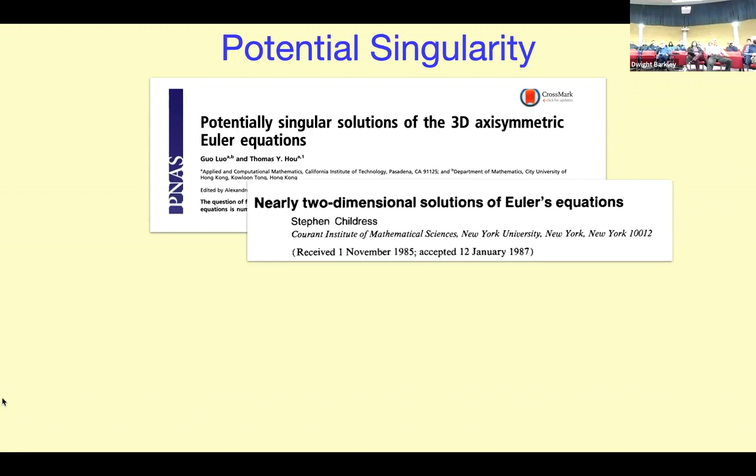So just to tell everybody what the flow is: it's flow in a cylinder, so it's wall bounded, it's axially periodic, it's Euler flow. The initial condition is pure swirl, so you have a sinusoidal azimuthal velocity, counterclockwise in the top and clockwise in the bottom, zero at the midplane. The relevant thing we're going to look at initially is the vorticity, which is the axial shear of the swirl velocity, at the cylinder wall at the midplane.

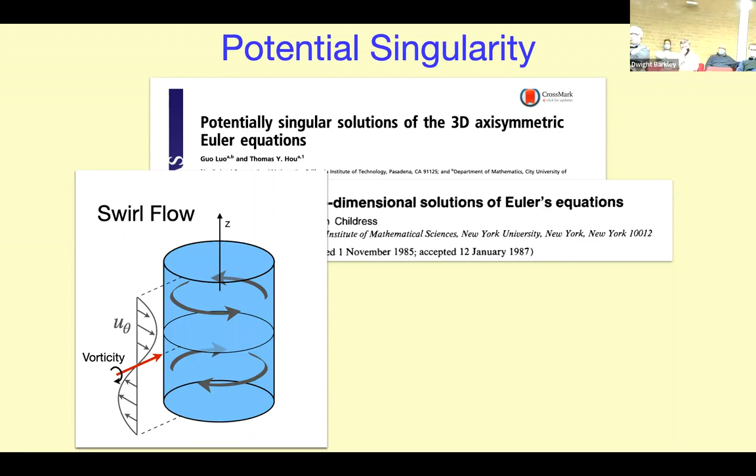Luo and Hou did a very high resolution simulation of this flow, and they found evidence for a finite time singularity. This was referred to a couple of times last week. Here's a plot, the log of the vorticity vector which I showed, as a function of time, and it shows an extremely rapid divergence. They did a lot of other analysis I don't want to get into, but note the divergence exponent is about 2.46.

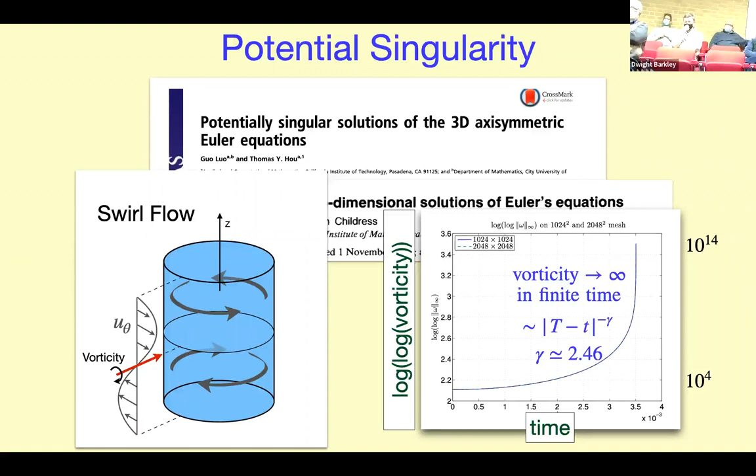Okay, so that's the flow I want to look at. And the thing is, I want to look at it from the point of view of somebody like myself who does continuum mechanics and thinks a lot about mechanics. I want to think particularly about what it is about this flow that potentially leads to a singularity. I'm not trying to solve the general problem, I'm just trying to understand this particular flow. I want to be clear about that from the beginning.

If you think about this problem, it's very natural to focus on pressure rather than other things, because in an inviscid flow, pressure is the only stress acting, it's the only way you can accelerate the flow. So it's a natural thing to think about when you do mechanics.

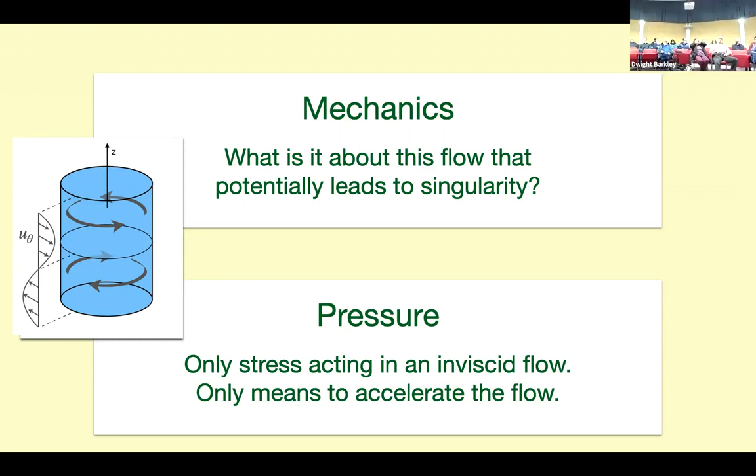Luo and Hou had exactly one visualization of the pressure in this paper, and this is in fact partly how I got involved in this. You're looking at a meridional slice through the cylinder, where the place the singularity is going to form is on the outer wall of the midplane, which in this figure appears down here. This is the pressure field that they saw, and this is as close to the singularity time as they can resolve.

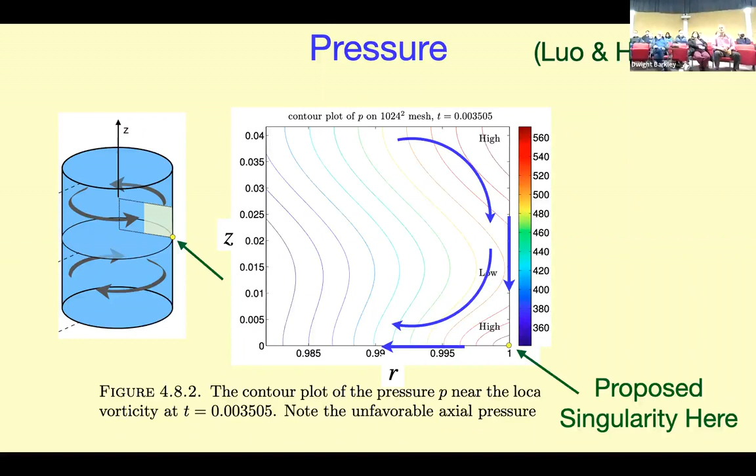It didn't take me any time at all. You look at these contours, and you can be sure that there's no possible way this flow could be singular. This is not possible. If you have pressure contours that look like this, the flow cannot be singular. So for about 10 minutes or so, I was convinced they had made a serious error. That's just not possible. Now, I was wrong, they were right. But the story is interesting. So I'll let you think about how I can be so sure so quickly that it couldn't be singular.

So what I'm going to do is first describe the flow in more detail, since I haven't really described it in great depth. I'm going to remind the broad audience a little bit about Burgers singularity, the aspects of it that I need. Then I'm going to discuss the mechanics, and how you can decompose the pressure and slide a lot under the rug there, and then discuss how you can model this with a closure.

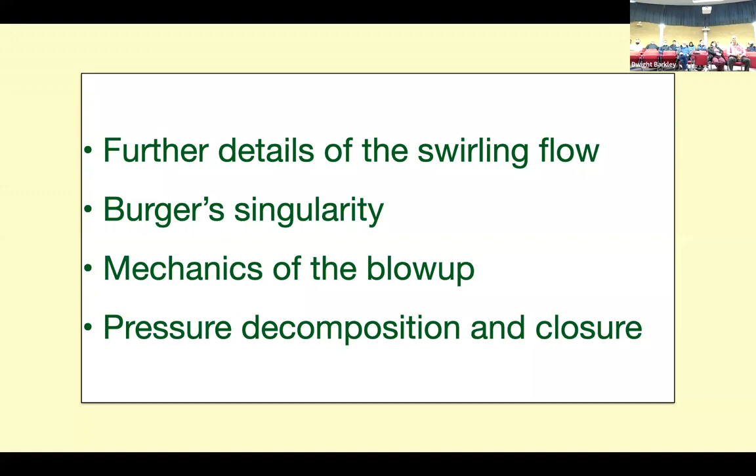Okay, so the one bit of physics that I really need you to know is that curving a streamline costs you a pressure gradient. Everybody knows that with a swirling flow you have high pressure on the outside and low pressure on the inside. You have to have that. A curved streamline is an acceleration, you have to have a pressure gradient. It's the only stress we have in this flow, the only way we could add a force to the flow. It has to be a pressure gradient.

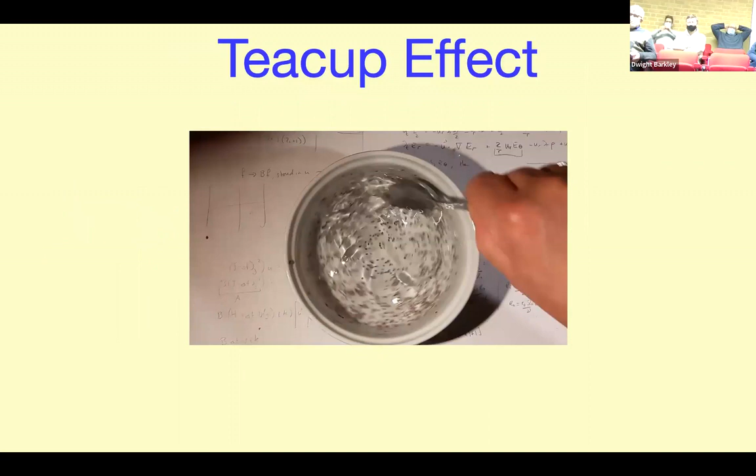And then you need to know that it goes as velocity squared. That's going to come up constantly in this talk, it goes as the azimuthal velocity squared. People know this teacup effect, this is Lorette stirring some grains in a dish, and contrary to what you might expect, they're slightly denser than the fluid.

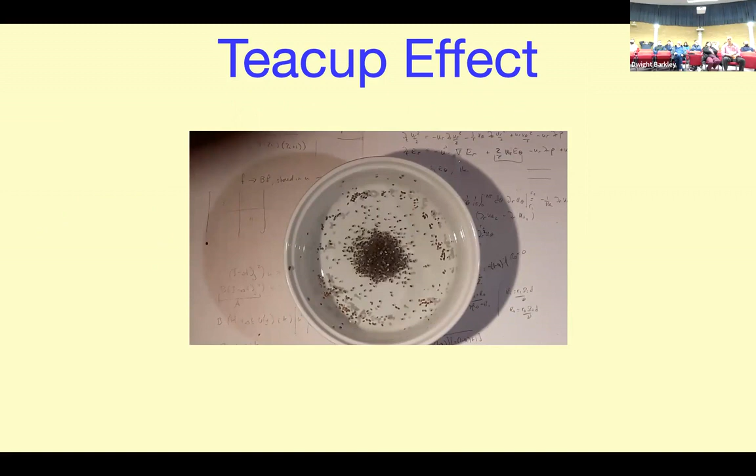You might think they could go out, but in fact they go in - it's the teacup effect. I think people are generally familiar with it. You can do anything at the institute afterwards if you're interested.

Einstein is credited with being the first person to explain it, although people before Einstein surely could explain it if asked. The reason it occurs in a teacup: if you have a bottom boundary, there's a viscous boundary layer there which slows down the azimuthal velocity. The azimuthal velocity goes to zero, and hence this balance between the azimuthal velocity and the pressure gradient is no longer satisfied. You have a pressure driving flow along the bottom wall, and then you get recirculation.

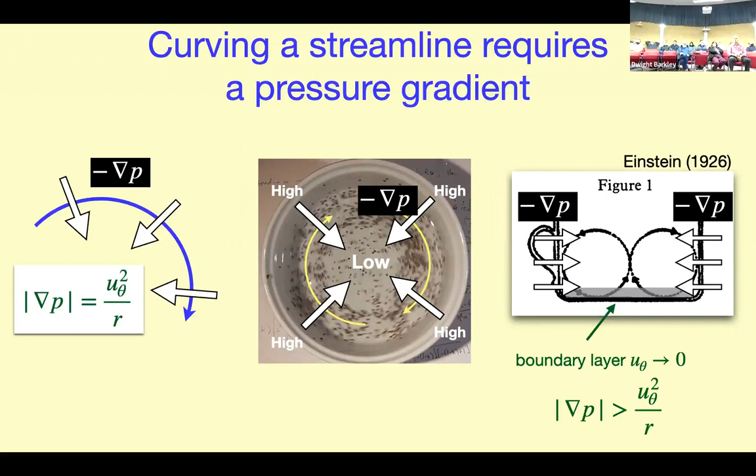It's secondary flow, and we refer to that as the secondary flow. This primary flow, the swirl - that's the way it works. Now this is a similar thing, you can do a similar thing in this case. You replace the bottom boundary layer by symmetry. So you have swirl on one side at the top and the other side at the bottom, zero swirl at the center. By symmetry, that will remain zero swirl. So you have exactly the same situation, but without a bottom.

So what you're going to have is swirling flow here, that will give you a high pressure, and swirling flow there, that will also give you a high pressure. Notice it doesn't depend on the sign because it's quadratic. Low pressure in the center where there is no swirl, so you have a pressure gradient acting. This is the way you would explain it in terms of pressure. There's an equivalent explanation in terms of vorticity, but I'll explain it in terms of pressure.

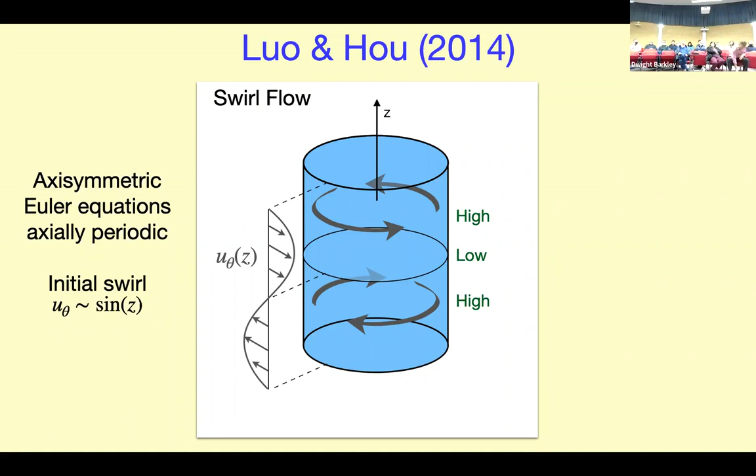That will drive a secondary flow, which for the full period of the cylinder repeats this four times. The teacup is just a quarter of the cylinder, from here to there - that would be the teacup that is repeated by symmetry.

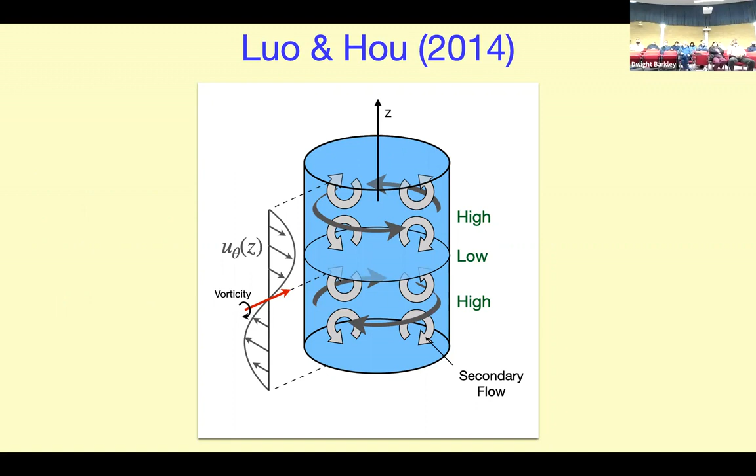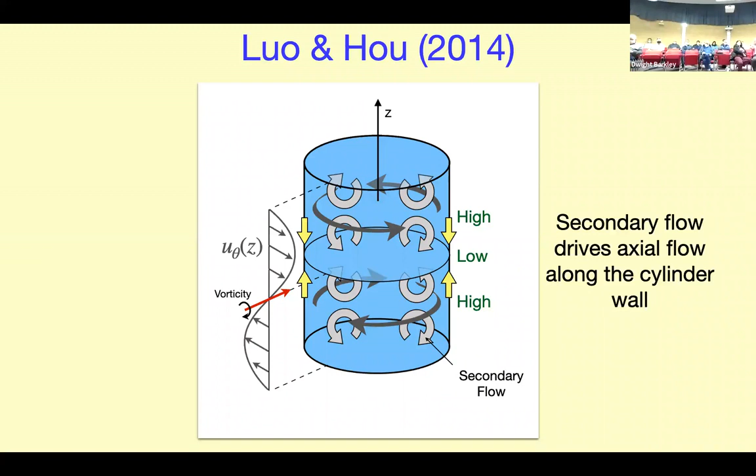So that's the secondary flow. That secondary flow, you can see, is going to drive axial velocity towards the midplane. And when that happens, it's going to bring the swirl with it. You're going to drive the swirl towards the midplane, and you're going to intensify the vorticity. That's the mechanism - that's the basic kinematics of what happens.

I made a little model out of things I managed to pull around from the institute. Okay, so here's your flow. If you just had straight flow here, it wouldn't do anything, right? It's Euler, there's no viscous stresses. But if you put this in a container, so it's being forced to be curved...

Never mind this. Anyway, so that's your vorticity blowing up. It's this gradient of the swirl velocity that is the vorticity that's blowing up. Kind of key that you understand that.

Okay, good. Any questions? So now I'm going to show you a little movie from my simulations. It's the same thing, you'll see.

Actually, I do have a question. That's okay, yeah, let me just - okay, so you see the movie, that's out of the plane into the plane. They're coming together. Okay, guys, go ahead.

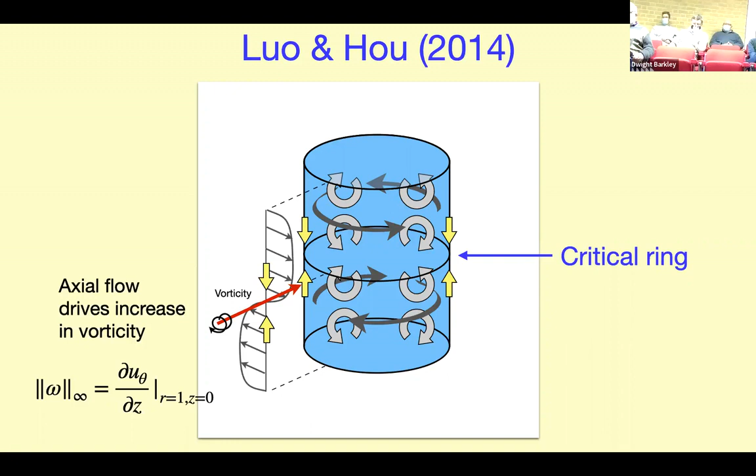Well, it depends - so it's here, and then it drives the flow, in terms of the teacup, along the bottom of the teacup towards the center, and the tea leaves are more dense than the fluid, so they settle in the bottom center of the teacup. If you're asking about the teacup - oh, in that movie, the things were settled on the bottom. They settle on the bottom because they're more dense. That's key.

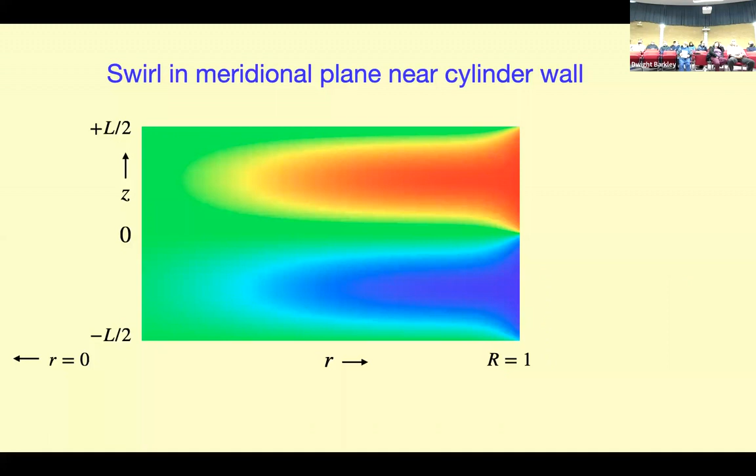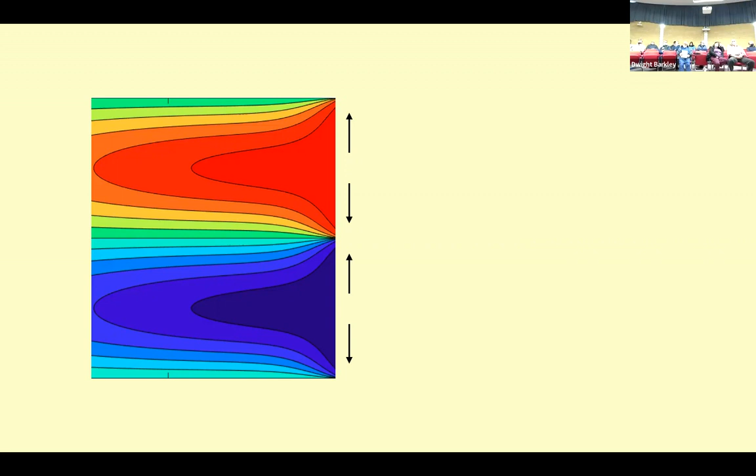As close to the singularity time as I can simulate with this kind of basic simulation. This is what the secondary flow actually looks like - not just a sketch, but the actual secondary flow - and this is the driving of the flow towards the midpoint. Let me just say, this is the meridional flow. This is most of what we're going to see, these meridional planes, so theta equal constant, and it is axisymmetric. So obviously, you're in the middle of the plane, and you're only looking very near the outer walls.

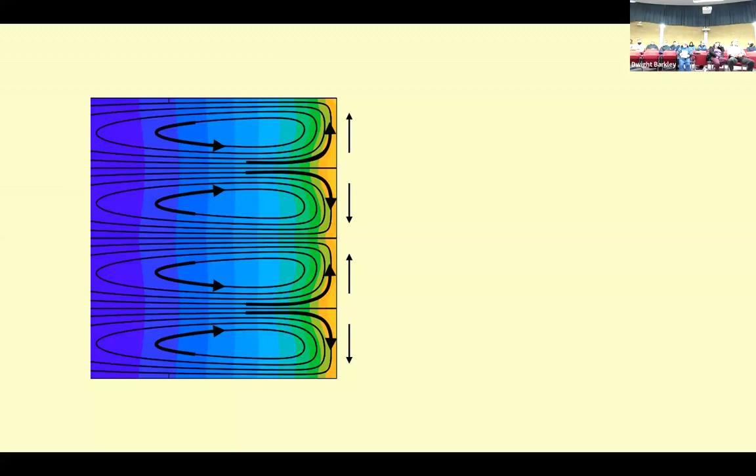What I'm going to focus on is an enlargement of a very small region, size 10 to the minus 3. This is what I care about: a pressure field and the meridional velocity in the plane. You don't see the swirl. It's this pressure field that I want to understand.

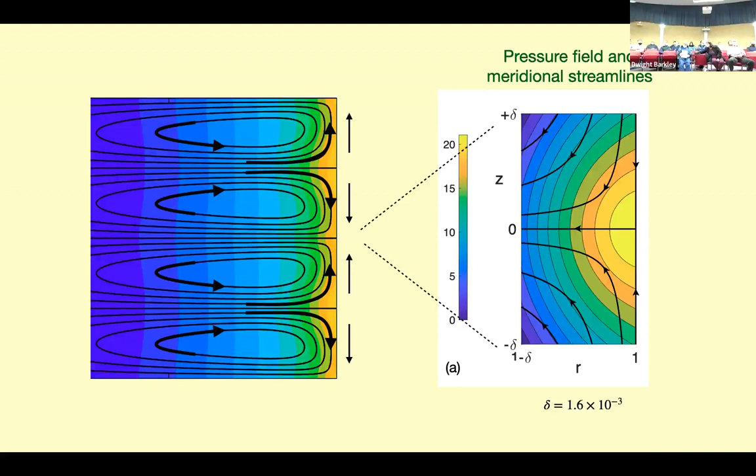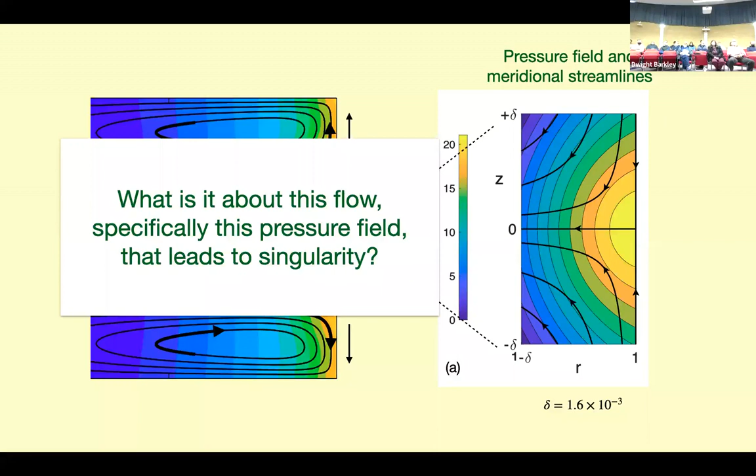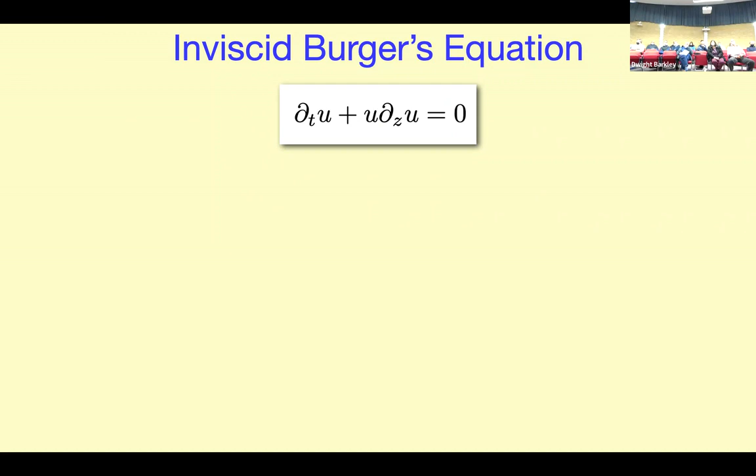Let me give you this, since I know there's different expertise in this audience to discuss this equation, and there are some things I'm going to emphasize. So I'm going to consider the inviscid Burgers' equation, our friend, which has been mentioned many times last week.

We know that if you start with an odd solution and evolve it, you get a singularity. It's normal to think of that in terms of the characteristic equation, but I want you to think about this in terms of inertia. As we know, this is a statement of the acceleration of the fluid, and over here go the stresses. There are no stresses in the inviscid Burgers' equation, so the acceleration is equal to 0.

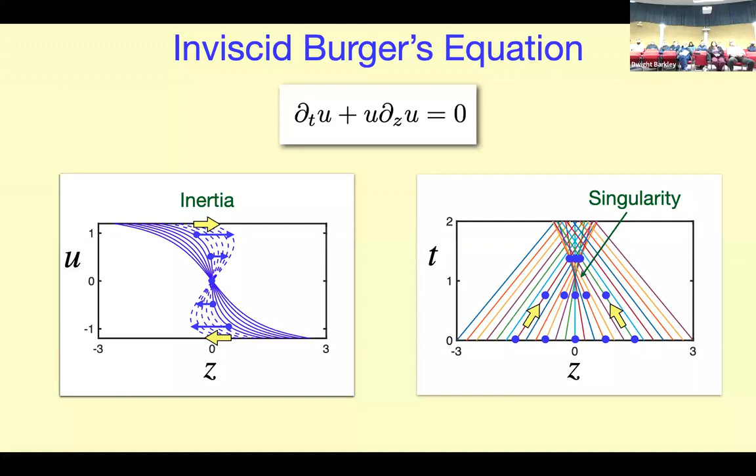So you invoke Newton's first law: velocity is equal to a constant unless acted on by a force, and that's why you see straight characteristics. That's a statement of Newton's first law, and I want you to think of it as inertia. The fluid is coming in, there are no stresses to stop it. All the fluid particles move in straight lines, and they just overtake one another. So it's that physical equation.

For people who aren't familiar, the way I'm going to analyze this for the actual Euler equation, so we do the first practice problem for inviscid Euler, is I'm going to take a gradient at this point of symmetry, of odd symmetry, where the velocity is 0, and take the axial gradient of that. We'll call that capital W. Throughout this entire talk, capital W will never mean anything else other than a gradient of the velocity at this point.

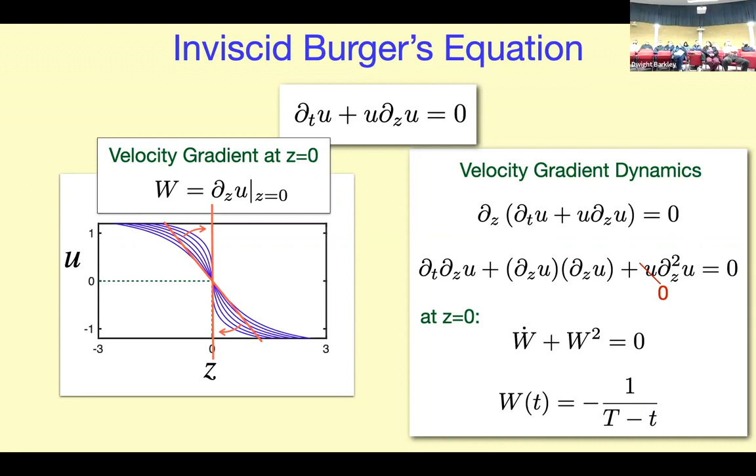So then you can work out, if you differentiate this in Burgers' equation and use the fact that the velocity is 0 there, you get this equation for the velocity gradient, which you can easily integrate up to see the singularity, just in terms of the velocity gradient at that point. Again, that's a standard thing, but it's very useful for me to show you this first.

If you haven't picked up on this yet, I was specifically calling that Z with the idea of being analogous to what happens on the cylinder, where I'm going to be looking at what happens on the wall of the cylinder, and Z equals 0 will correspond to this. That's the analogy I said. Now the difference here is that for Euler we have the full 3D Euler, and we have the pressure stress, the stress on the side, so we have to understand that. But the approach is going to be similar.

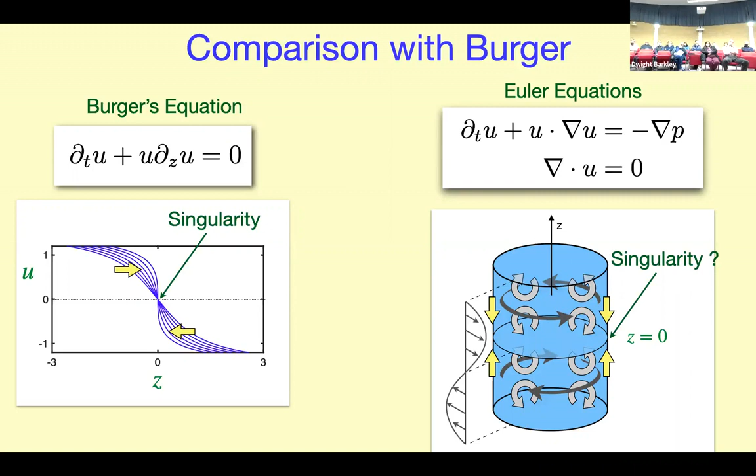I'm now going to discuss the mechanics of this. I'll repeat this same statement over and over, but as we get further into the details, what I want to understand is how this pressure field, this real pressure field in real incompressible flow, nevertheless allows for a singularity. I'll note that there's the inertia coming in, which we saw from Burgers', that's still there.

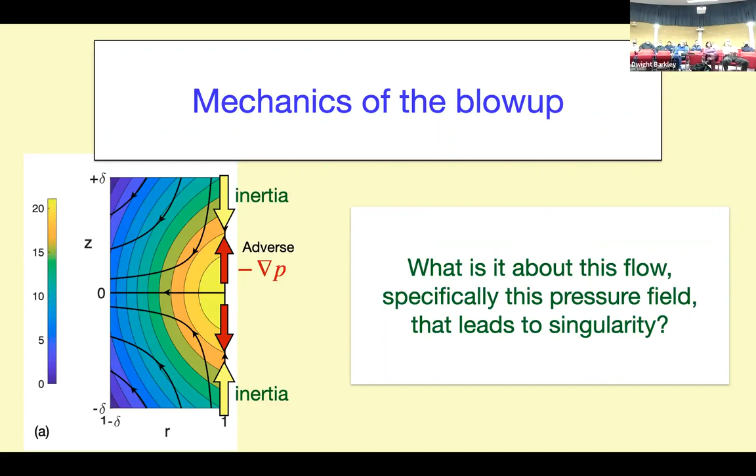This fluid has inertia coming in, but there's a pressure maximum here. There has to be a pressure maximum in fluid dynamics — I could have told you that right at the beginning. You have to be diverting the inward flow towards this midplane. I told you if you curve a streamline, that costs you a pressure gradient; you can't do that any other way. There has to be a pressure maximum at this point. There's no other way for this flow.

Yes. Yeah, with that picture, it's more or less exactly the picture I'm describing in 2D for the growth of vorticity. It's this result of Sverak, and that would be very... okay, gotcha.

What I'm saying is that something like this does give rise to double exponential growth, but may not give rise to singularity. We'll discuss that. It would be very interesting to know what this approach might have to say about that example. I think that's a very interesting question. I'm wondering about it, but I don't know how to approach it.

This is 3D then. Yeah, of course, this is crucial — I mean, I lost my little yellow vectors, they didn't stick on. But this is a 3D flow.

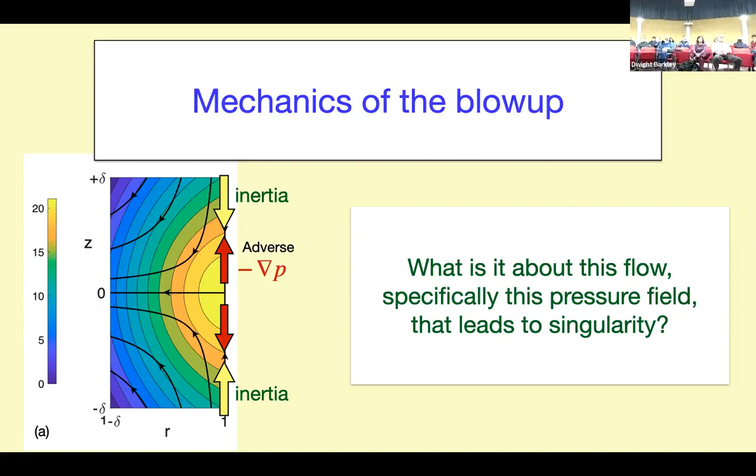Okay, so I have to account for why that pressure stress isn't sufficient to decelerate the flow. That's what I'm going to do. I'm just going to write down the velocity gradient for the Euler equation. Many people have done this or seen this, but I'm going to go through it.

I'm only going to evaluate the velocity gradient at the critical ring, that's where the singularity is, and there are only three surviving entries. W is the axial gradient of the axial flow, that's all it ever means. B is the radial gradient of the radial flow, and omega is the axial gradient of the azimuthal flow, that's the gradient I keep referring to, that's vorticity. But that's all that survives.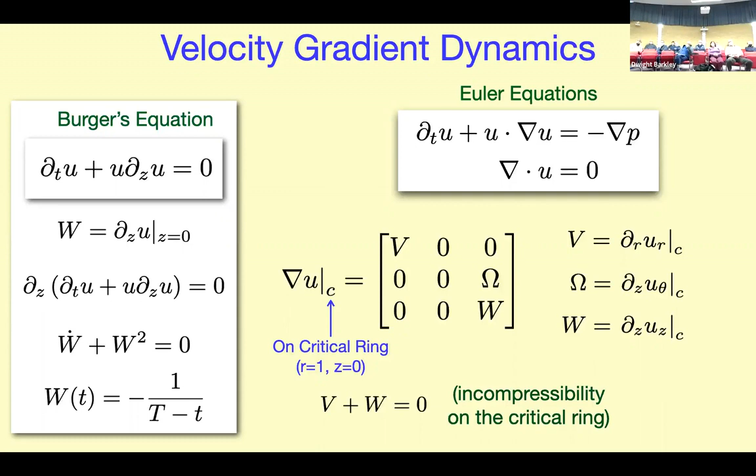And of course, this is a traceless matrix by incompressibility, so there's only two independent parts.

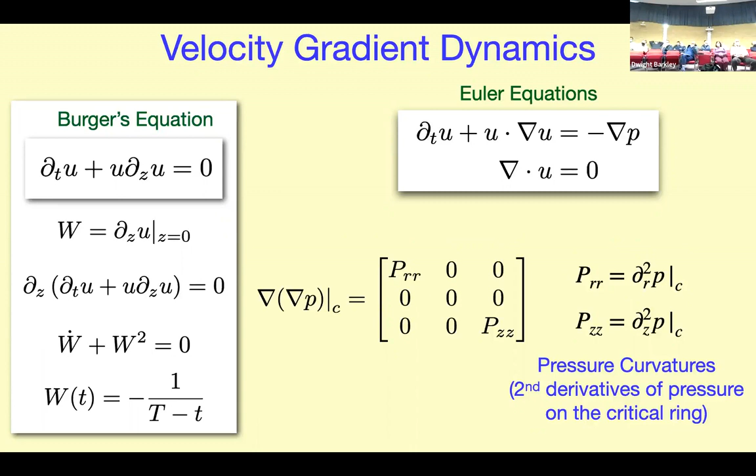Then the good part is that I look at the pressure Hessian. So I have the two diagonal elements, that's all that survives: the second radial derivative and the second axial pressure Hessian. I'm going to refer to these as pressure curvatures, and I want you to think about it that way. If I take my pressure field and draw it as a graph, then these are the principal curvatures of that surface at the critical point. It's very useful to have that terminology to think about.

What was W? W is the axial gradient of the axial velocity.

Okay, so that leaves me with these three equations. If I just plug into Euler and evaluate the velocity gradients at the critical point, I get three equations and four unknowns. And these have a very clear physical meaning.

This is an axial momentum balance. This is the same thing I had with Burgers, but now I have the stress that appears on the inside. This is vortex stretching, nothing else to say about that.

And then I have, you can do this one of two ways: it's either the pressure Poisson equation, which evaluates at the critical ring, or equivalently it's a statement about mean curvature. The two pressure curvatures sum to twice the mean curvature. So minus W squared is the mean curvature. That's a very useful thing too.

So I have three equations and four unknowns. Obviously I can't solve this. But these equations are very, very useful for understanding what's going on.

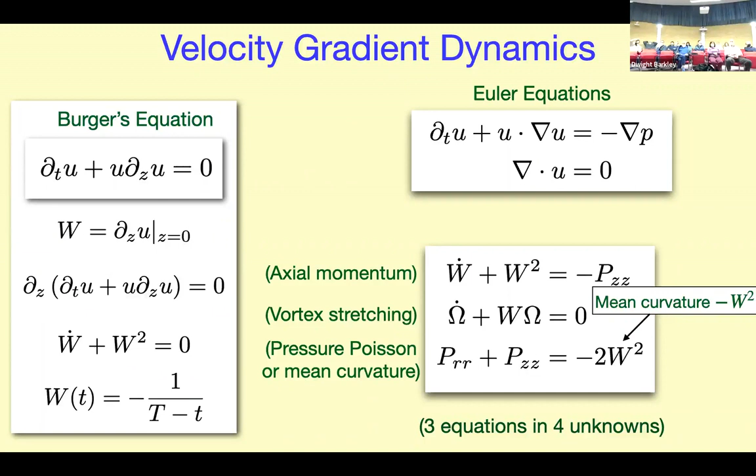Okay, so I'm going to do three problems. And then there's going to be a quiz later because I'm going to come back to these same three problems. Pay attention. So the first thing I'm going to do is scratch off the pressure.

That's going to take me back to Burgers, obviously, together with the convection, and I just carry the passive scalar along with it. So I just reproduce Burgers' equation, which we've already done. It's a singularity. The vorticity now blows up along with the same as before. It's just nice to know that this contains Burgers' equation.

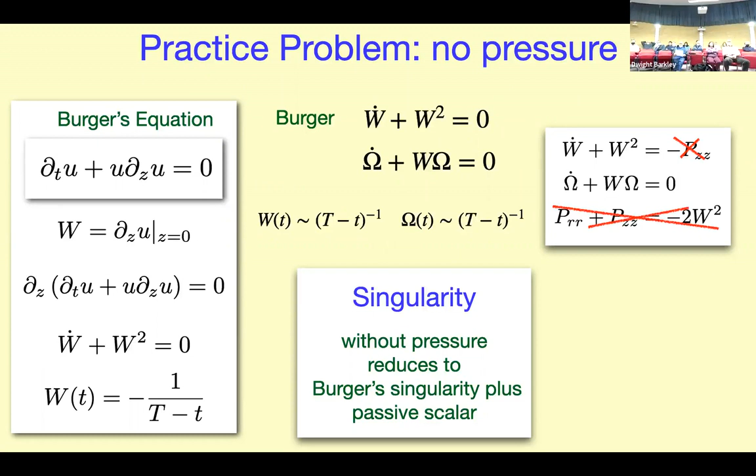The next practice problem is: let's suppose we have a symmetric pressure field. There's no reason you'd have a symmetric pressure field, but let's just suppose we did. Then the pressure curvatures are equal. So I have my pressure Poisson equation to worry about here, and if they're equal, they're both equal to the mean curvature. So PZZ is equal to the mean curvature, which exactly compensates that.

And if you look at the equations, my axial momentum balance has the nonlinearity exactly balanced by the pressure stress. They exactly balance. W dot is zero and there's no singularity. Good thing—it's a two-dimensional flow, it couldn't possibly be singular.

So if I have the symmetric pressure, my view is that that is probably the simplest example you would ever show somebody if you want to just take a saddle plane and show how the pressure stress exactly balances nonlinearity to suppress what would be a singularity in Euler. It's suppressed when you include pressure. That's the example I use.

So I have, again, I'd like to think of it as I have a curvature budget to use. And if I use them equally here and there, and I have a pressure gradient here and a pressure gradient there, I've used them equally, and that will exactly balance the inertia. So W dot will in fact be exactly zero.

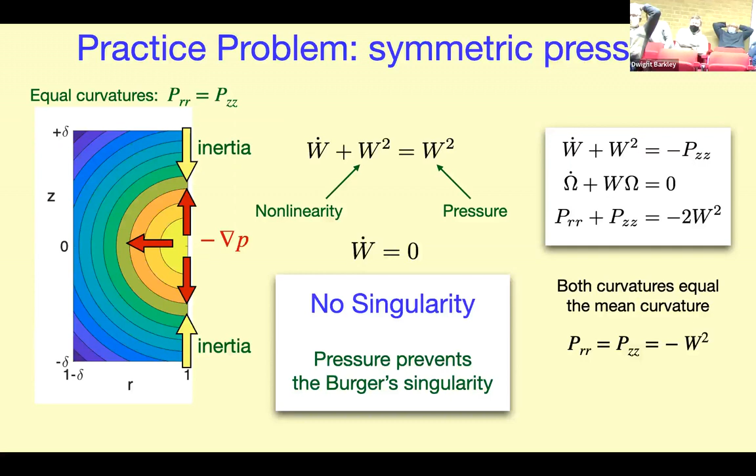Okay, now let's just do the real problem. So the real problem looks like this. The pressure field looks like this. You maybe didn't really notice very carefully what it looked like, but now I'm showing it to you.

Okay, these pressure curvatures are not equal. The radial pressure curvature is larger than the axial pressure curvature. They're not equal. So I will define A such that this is true, and then I define it with A squared so that I get this as a ratio of length scales rather than just this.

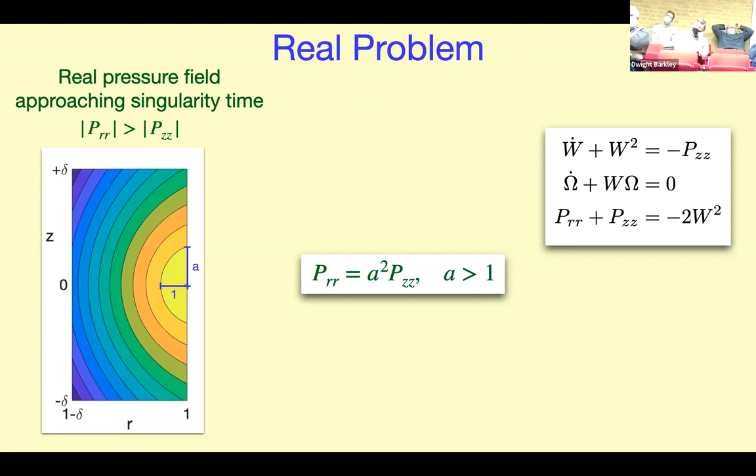Okay, you can see that in this figure the A is bigger than 1. That's very important. But let's just play with some algebra. Whether or not A is bigger than 1, you can just do some algebra, and you'll get that, of course, if these two aren't equal anymore, you wouldn't expect this to exactly balance that, and it doesn't. You get a statement here, depending on the value of A. And you can see if A is bigger than 1, this will be less than 1, and this won't exactly translate.

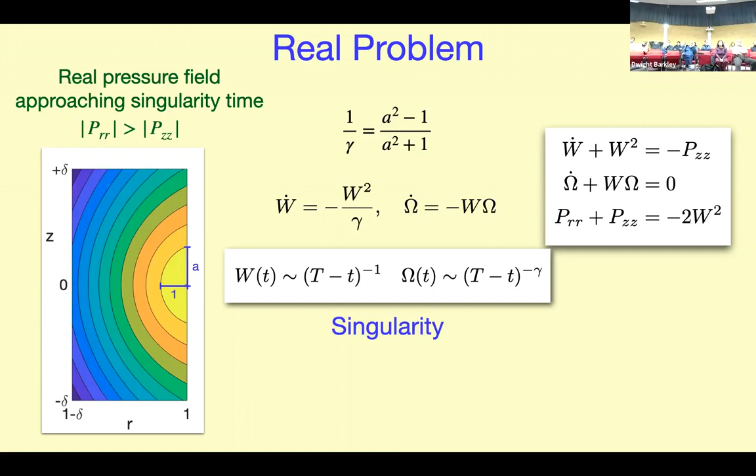So we have this blow up. And if you look at the Luo and Hou simulation, the exponent was 2.46. If you translate that exponent back, A is 1.54. Here I've shown 1 to 1.54, as close as I could do it in Keynote. And you see that that is clearly the signal of that exponent. That is what you would expect to see in a pressure signal for blowing up by this mechanism with that exponent. And there it is. It's really the thing.

I'll get back to the assumption that these are constants. So what I'm saying now is that once you make these unequal, then you have your curvature budget. You use a bunch here and less there, and you don't have enough to suppress this incoming inertia, and you'll get blow up. And that's a very simple problem. What makes you think that A should be time independent? But let me address what happens there.

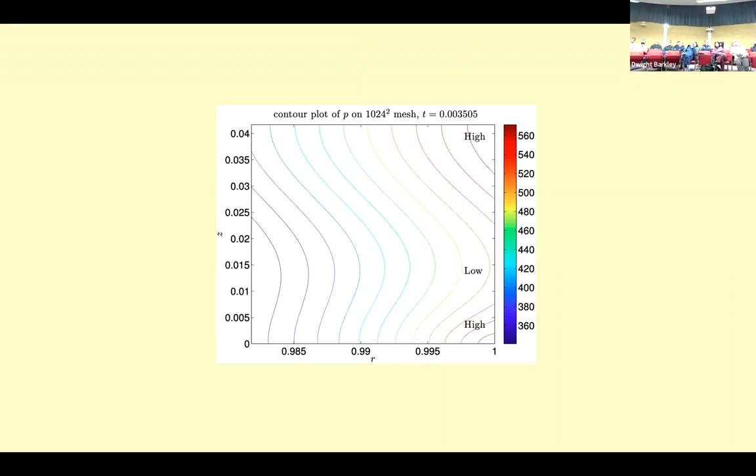So you can now maybe appreciate why I was confused by this. This is wrong, this contour is going the wrong way around. The thing is that you hadn't plotted it with the right aspect. You plot the right aspect ratio, now you see that's the signature you're looking for a blow up, not the other way around. You need that signature. You need this to be bigger than that, so that you have less pressure gradient in the axial direction. So that's why I was confused by it.

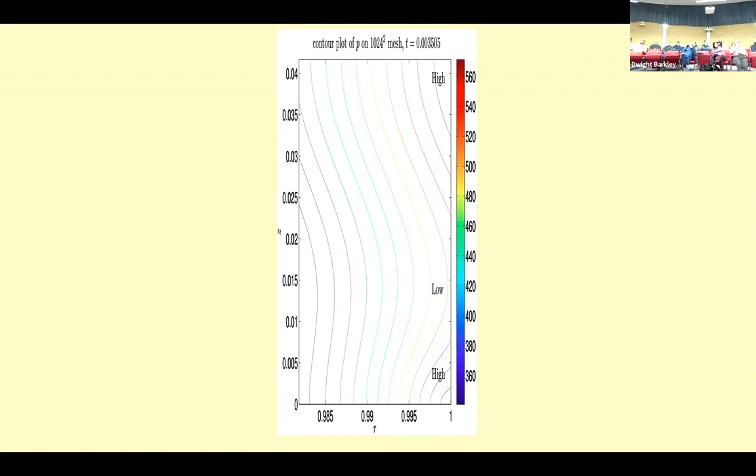But there it is. As close to the singularity time as they could measure, there's that signal. That's what you should be looking for. That's the signal for blow up. So the curvature of the radial is less than... greater. Now the curvature of the radial is greater, so greater pressure. So you're throwing fluid radially inward faster than you're slowing it down axially. And that will be nice. So these are simple calculations.

Okay, so the thing is, and this gets back to the non-constancy. As long as this is persistent, as long as it's persistent up to this time, this will be the same. I don't do theorems. I'm sure that half the people in this room will turn that into a theorem. It doesn't prove anything, but you need these to be satisfied. It wouldn't be difficult to write this formula down with the conditions. It's just too simple.

Okay, so now this is what I really have. That's the introduction, so this is the easy part. If you have this pressure mismatch, then you don't have enough stress to decelerate the incoming fluid. And then the question is, why does that happen?

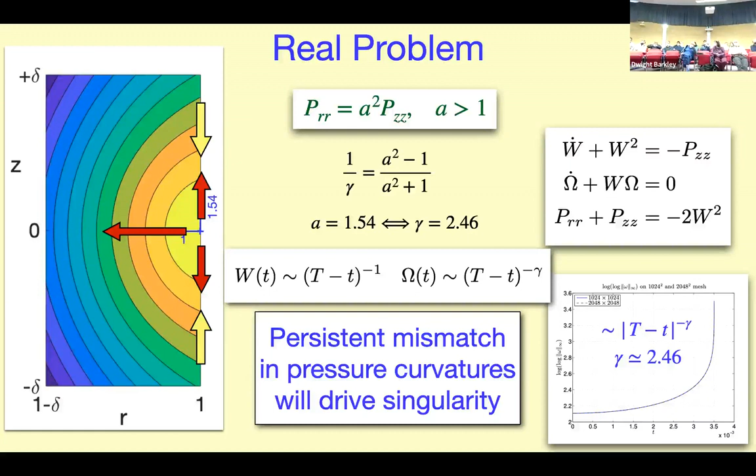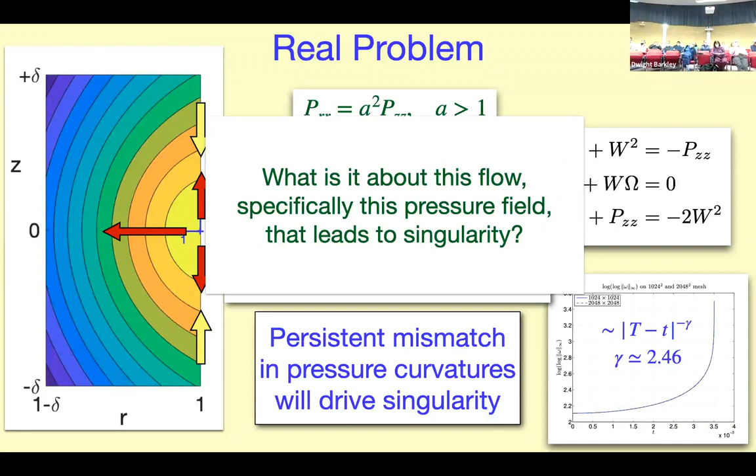Okay, so now I'm going to explain it. Same question again - I got somewhere in it, but I still haven't told you why. So now I have to do this. There's a lot of applied math technicalities here that are not very important, and I don't want to get too involved in communicating them. You can read the paper, but I'll try and give you the highlights.

So this part is known, this part is easy. We have the Euler equations together with its boundary conditions. Wall-bounded flows, so the penetration is zero. The radial velocity at the wall - later on I'm just going to call this the wall - the radial velocity at the wall is zero.

So, to maintain incompressibility, the pressure must solve a Poisson equation together with boundary conditions such as to confine the fluid. So the fluid is doing two things, and the pressure field is doing two things. So this is what we have - our pressure Poisson equation together with this boundary condition.

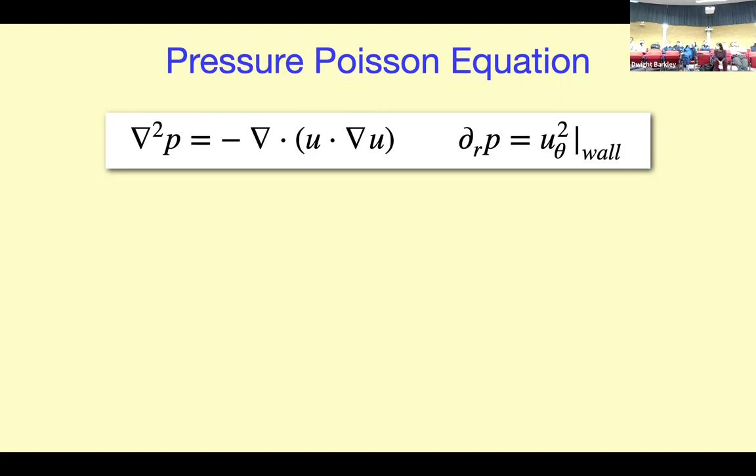Now, something that I think is very underappreciated in certain communities - this is a linear equation indeed. I know, but it's somehow forgotten because it's not linear in the velocity. It's nevertheless linear in pressure. So we can exploit that, and we can separate it just as you always would.

I'm going to separate it first into contributions from the meridional velocity and the swirl. I'm going to do those separately. You can separate those two contributions to the pressure field. And then I want to separate the parts from the swirl having to do with incompressibility and confining the flow - you can separate all those terms out separately.

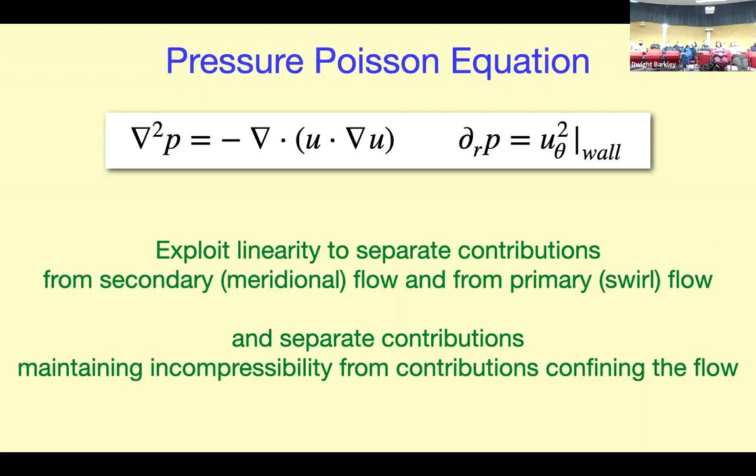Okay, and then this is where the details are that I don't really want to get into. I'm going to sweep it under the rug mostly with the pictures, and I hope that will suffice. I'm sure you could all write this down if you wanted.

So let me just show you. First, I'm going to separate the pressure into two parts, one due to the meridional flow and one due to the swirl, and I will explain it in pictures. So this is the full pressure field, and it's a linear superposition - there's no approximations. This is just a linear superposition of two.

One, I'll call it P2D, and it's a function of the pressure field - these are the pressure contours that you see here. It's determined by the radial and axial velocity, so the velocity field in the plane. The velocity field is shown by these streamlines here.

It's global, it's the whole cylinder, but I'm showing you this piece right here. This supports all the curvature, the mean curvature of this flow. It has to all be contained in the meridional field because it's dependent on the meridional field - it can't be dependent on the swirl. So this and this have the same mean curvature.

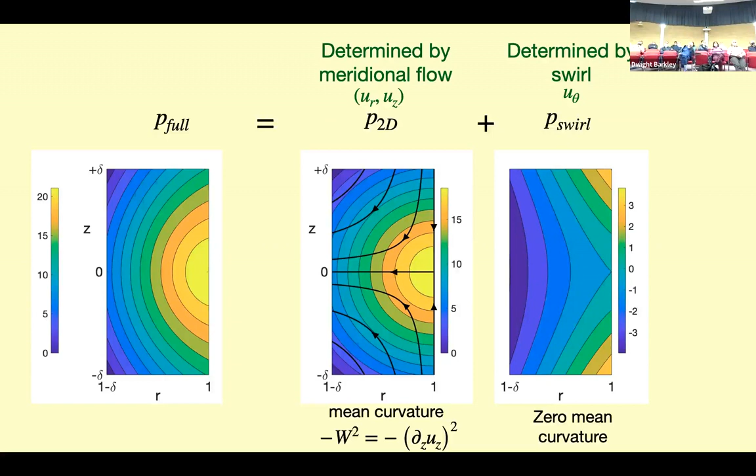So that's one of the two pressure fields. The other one is dependent only on the swirl, so the flow into and out of the plane. And that generates this pressure field, and this pressure field necessarily has zero curvature at this point.

So it's a saddle point, and it encapsulates the teacup effect - high pressure here, high pressure here. There's an axial gradient of the swirl, which you don't see. So I'm showing you this one, but it gives rise to motion towards the midplane and away. It's entirely contained in this pressure field.

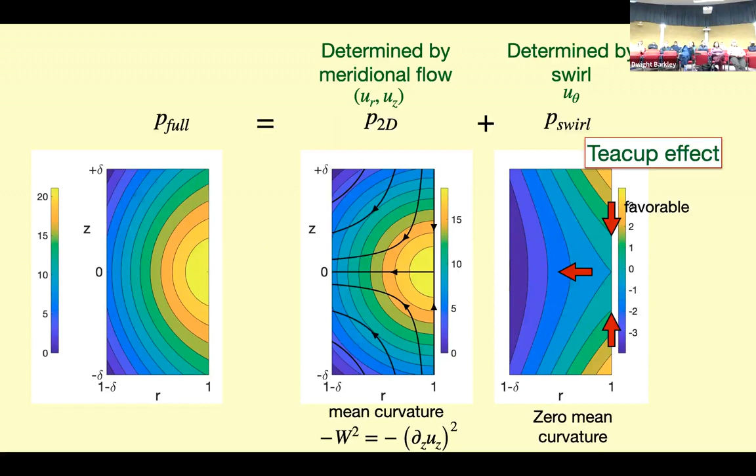Okay, so I've done that. Now what I need to do is separate this swirl pressure - it contains both the boundary part and the interior. I have to separate boundary from interior. I don't know if any of you have ever done this in cylindrical coordinates, but if you try to separate a Poisson problem into boundary and interior parts, it doesn't work that way - there's a third part that you have to do to separate.

Okay, I'll just talk to the experts here. If you were doing a Poisson-esque approximation, this wouldn't occur. So I'm just going to sweep it under the rug - I'm going to combine this with that. I'm not really doing anything fundamental.

Let's do this. I'm going to decompose my swirl into two parts: one part determined only by the swirl on the wall, which is not the interior problem, and the other determined by the swirl in the interior. So I separate the boundary swirl from the interior. That's a standard thing to do in solving Poisson problems.

Okay, now let's look at this, at least near this place. So this pressure field that you see here is determined only by the swirl on the wall. It's a harmonic function.

I heard at least two times last week people said under their breath, 'plus a harmonic function that we don't worry about.' And I grant in infinite problems maybe you don't have to worry about harmonic functions, but this wall boundary is a harmonic function. It's not doing anything towards the incompressibility of the flow. It's not, but it is a stress—it is accelerating the flow. It's just not accelerating in any way that controls for incompressibility, but it is nevertheless accelerating. It's a harmonic function.

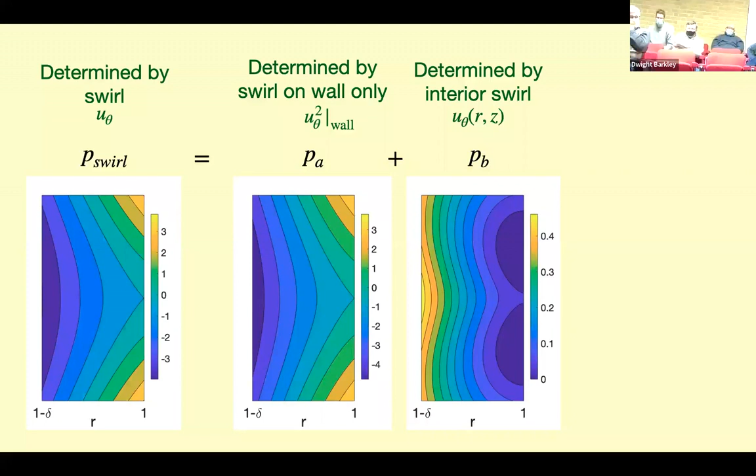This is the key one right here. You see that the pressure from the swirl is almost identical to the component determined by the wall, the swirl on the wall only, right.

I think we can skip that. So here's the summary and pictures of this part, okay?

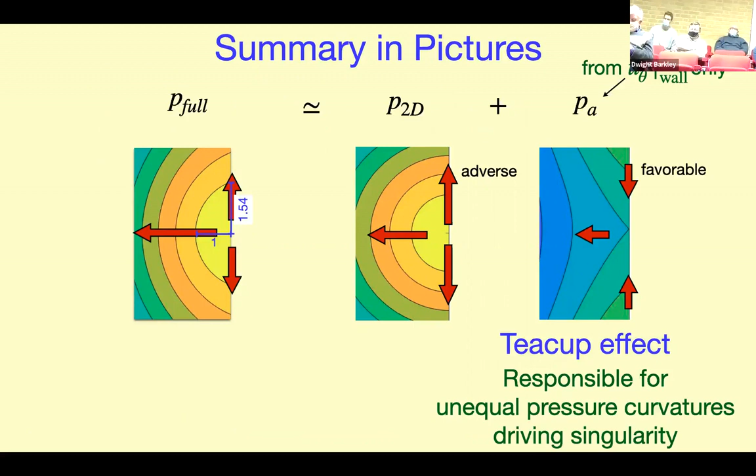So I have this mismatch of pressure curvatures. I can decompose that into two main contributions: one due to the in-plane flow, which gives me this pressure maximum that supports all the curvature of that—it's an almost symmetric pressure maximum, not exactly, I'll have to worry about that later too. And this part, which is determined only from the swirl on the wall, gives me a favorable pressure gradient, accelerating fluid towards this. And this is the essence of the decomposition.

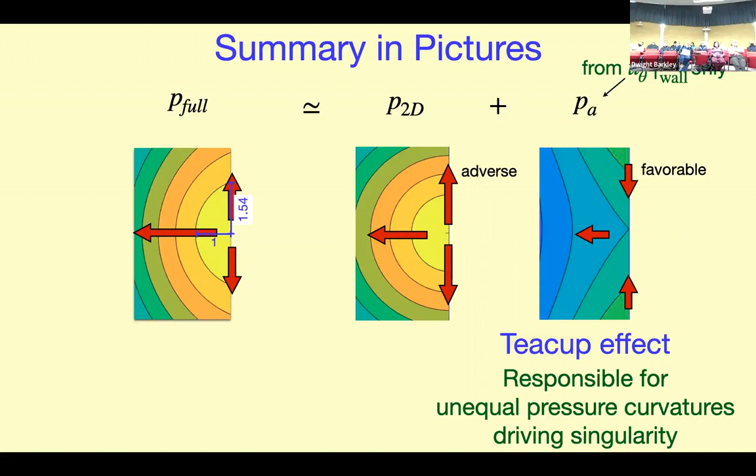Okay, so are we okay before I go on? Is that good? All right.

So this brings me to closure and the Hilbert transform. So here's all this from last week. There's a rich history of this—people in this room will know this much better than I. I believe the earliest paper on this is Constantin, Lax, Majda from 1985. So I'll have a nice review of the many different models that people use to study primarily vorticity equations with this transform.

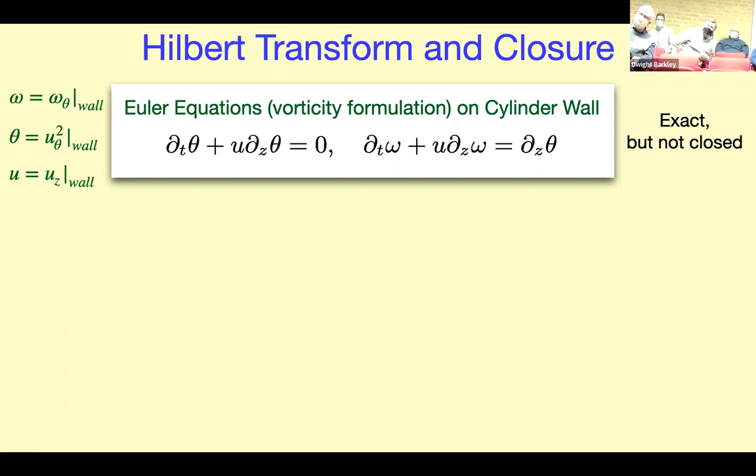So these are the Euler equations on the cylinder wall—exact, no approximation. You're going to have to get used to these variables. Omega here is the vorticity, the azimuthal component of the vorticity on the cylinder wall. Theta is the swirl squared on the cylinder wall—I'll just refer to theta as the swirl, but understand it's the square of it on the cylinder wall—and U is the axial velocity on the cylinder. So that's my swirl, and that's my axial velocity. And there's also vorticity.

Okay, so those are the exact equations, but they're not closed because they involve three quantities on their own. So Luo and Hou closed this system with this approximation, which you can justify—I think I can give a slightly better justification than they gave, but nevertheless I agree with it. In fact, let me just say I think it's a great closure, I think it's a great model, in many ways better than the model I'm going to break down. But in some ways I think the model I'm going to break down has some advantages.

But anyway, you close it this way, and then we can simulate and understand information. And they get—I believe it's now been proven—that this model with this closure has a finite time singularity. I believe that's now proven. But let me just point out that's an approximation. It's a good, reasonable approximation, but it is obviously—if it weren't an approximation—a proof of singularity.

So now this I'm doing inviscid. So the question then arises—there's a third variable here. These two are connected to the Hilbert transform. Here's the third variable: what's the Hilbert transform of that variable?

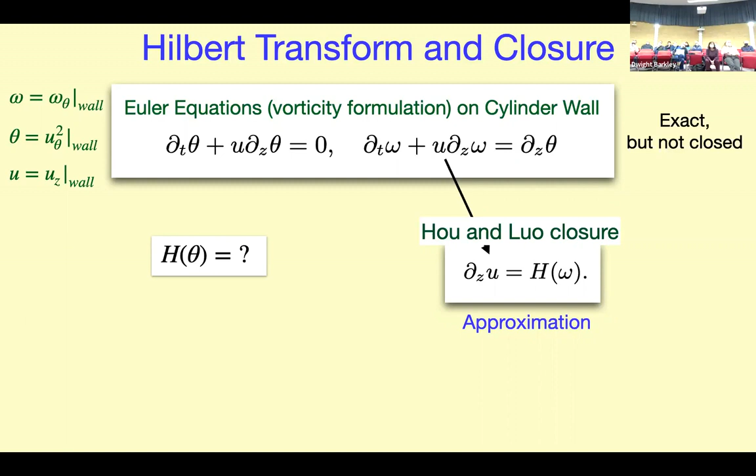But you could just ask that question—you could have never done anything that I just talked about for the last 35, 45 minutes, and just ask yourself, well, what is the Hilbert transform of that variable? I'll tell you what it is: it's the gradient, the axial gradient of this pressure determined by the swirl on the wall. That is a unique physical statement about what that Hilbert transform of that gradient is. And what's fun about this is that's not an approximation.

That's an exact statement, at least if you allow me to do so. So I have an exact relationship between these things. If you just want to see the calculation, h of theta is the velocity squared, the swirl squared on the wall. The boundary condition is that has to be equal to the radial pressure gradient on the wall. A Hilbert transform maps a normal derivative to a tangential derivative in a sense.

So I have now a way of closing that up, I have an exact statement. Obviously I'm not going to have an exact closure, but I have a different route closing the problem.

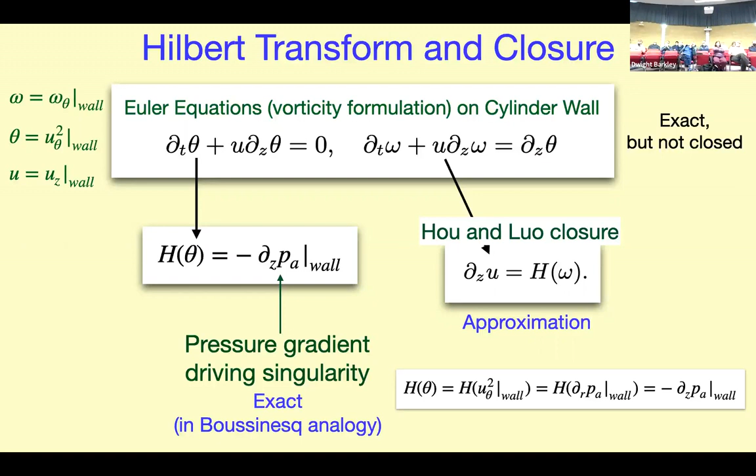Oh, I just say. Are we okay? Well, yeah, let me just give it my second.

So again, this pressure gradient, this pressure field that I told you is so important, is determined only by the swirl on the wall, which is a variable in the equation. So I know it exactly, and I know what this gradient is. So I know what's driving the flow, and I know it exactly.

All right, so here's the thing now. I'm going to do this in primitive variables. So these are the Euler equations, written in primitive variables on the cylinder wall. Again, they're exact, there's no approximation yet.

I've decomposed the pressure gradient into three parts: the part depending on the meridional velocity, the part depending on the swirl on the wall, and the part depending on the swirl in the interior.

The part depending on the swirl on the wall is the favorable part, and I know that exactly, so I don't have to approximate that. The other two pressure gradients are adverse pressure gradients. This is the main one, a big pressure maximum here I approximate this. And this is this other little annoying one sticking out. But I have to deal with this.

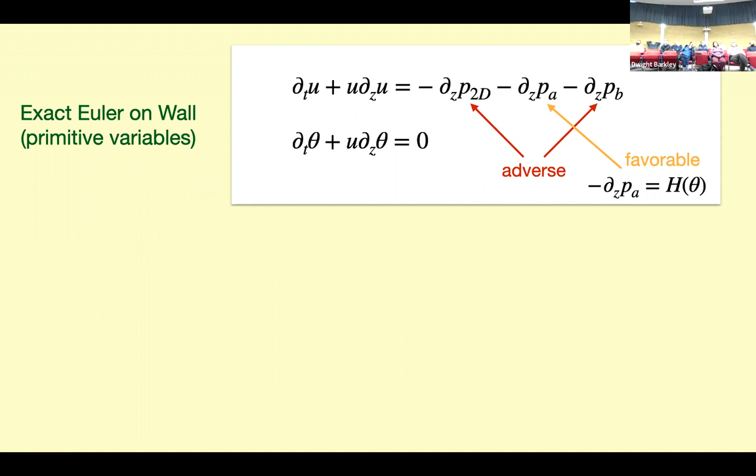So what I'm going to do is combine them together and model that. I'm going to put them together into one, which will be my total adverse pressure gradient. This is where the single modeling assumption is coming from. Put this aside for a minute and just look at this.

Suppose I had an exactly radially symmetric pressure field, determined by this meridional velocity. Then I could evaluate my pressure Poisson equation on any ray going out from here. They'd all be equivalent because it's axisymmetric, radially symmetric. So if I go along this ray, I integrate that pressure Poisson equation up, and I get this equation. So this tells me I have an exact relationship between that pressure gradient and the meridional flow on the cylinder.

So this is the approximation that I'm going to make. I'm going to replace these two pressure gradients with this pressure gradient given by this variable.

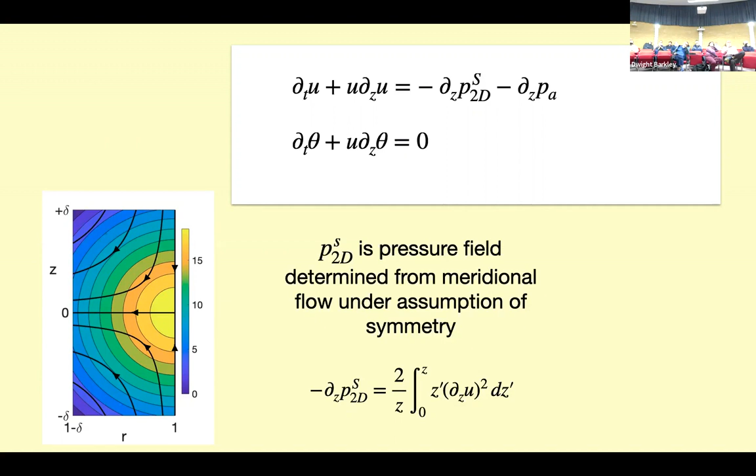So then finally, this is the model I have. It's Euler equations written on the cylinder wall with this approximation. So there are two variables, the axial velocity and the swirl, and two pressures: a pressure associated with the meridional velocity, given in terms of the axial velocity, so I have a relationship between this axial velocity and that pressure, an adverse pressure. And then I have the swirl, and a relationship between this pressure with a favorable pressure gradient and the swirl, and that one is exact. So it's a closed system, and this is my modeling assumption.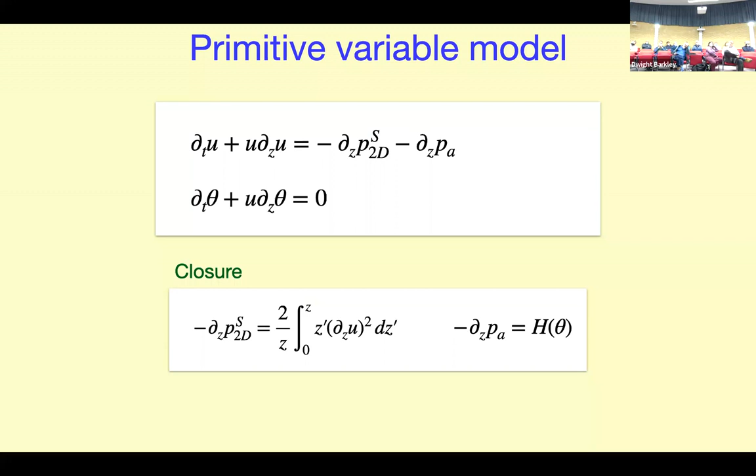Okay, let's look at the solution. So this is my equation. Remember, I told you the three cases and told you to remember them. Now I'm going to do them again, but in terms of this equation. Before I went to them at the critical ring, and now I'm going to look at them in terms of the model.

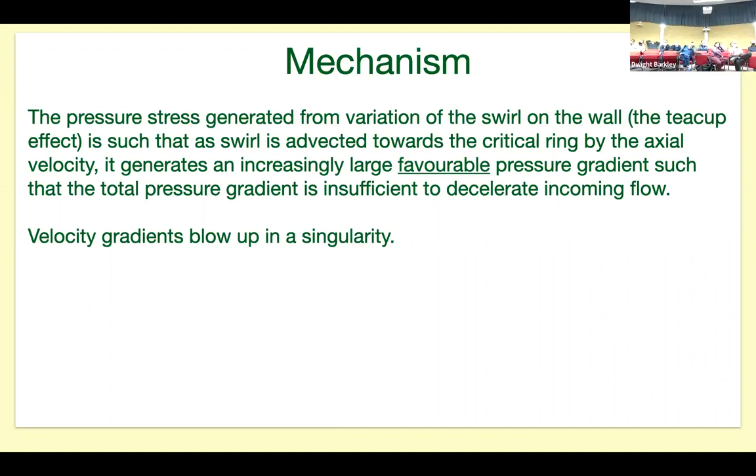It's such that as swirl is advected towards the critical ring by the axial velocity, it generates an increasingly large favorable pressure gradient such that the total pressure is insufficient to decelerate. That's the mechanism that doesn't exist in 2D, and as far as I know, I don't know how to get it in 3D other than putting a wall in. That mechanism exists in this case because of the wall. So the velocity gradients blow up this.

By this analysis, by writing down the Euler equations on the cylinder wall, I have a model of that, which involves only one assumption. I've reduced it to one, which is supported by the numerics. I've replaced the adverse pressure gradients, which I don't know how to compute, with something that I do know how to compute, but it does seem to be safe. At least from a physicist argument, it's safe in that if these equations blow up the Euler object, that's not proved—it's just the physicist argument.

What I like about it is it's a natural generalization of Burgers' equation to include both pressure and vorticity. Vorticity enters this equation, and the gradient of this is vorticity. We know you have to have vorticity to have a blow up, so it's nice that you include both in one system. And that's where you see the blow up, and it's published.

That all makes sense. Yeah, Dwight, can I ask about the physical situation?

Yeah, so this is an initial condition flow. The boundaries just say no penetration, please. Otherwise the swirl is what it is, set up at the wall. You don't care what it is—you set it up initially and then just let it evolve. That's right, it's certainly not driven in any other way.

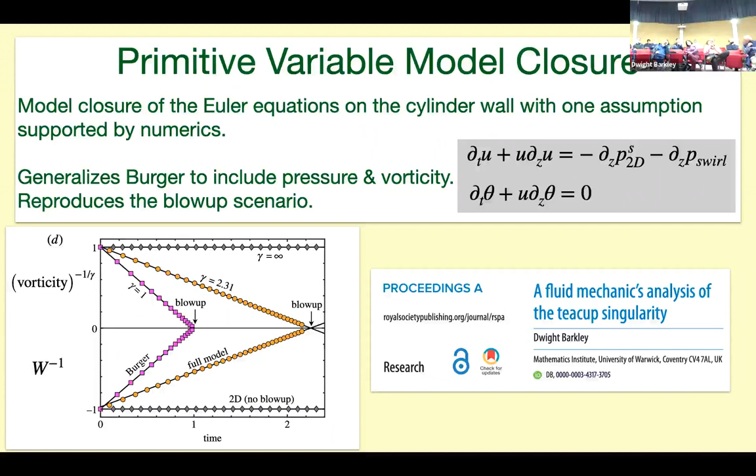This is the curvature of the wall that forces the flow to be curved. Yeah, that's all you're appealing to. That's all I'm appealing to. Exactly. That's all I'm appealing to. Right.

And associated with that, because the swirl varies axially, the pressure field varies axially. It must—you could make the same argument for just—I just think that in this case it's nicer. And again, that's the pressure field associated with that confinement, and it has an axial gradient which is driving the fluid towards it.

Let me just say, in case I don't know if you were going with this, but if you think about it, mechanically you cannot do work on the fluid. But the stresses are becoming—if you worked, I mean, if it made sense to build a cylinder containing the stresses on the wall, the stress gradient on the wall is also blowing up. So the material that would have to hold this will eventually shatter because the stress gradient of the material is blowing up, just as the stress gradient in the fluid blows up.

Oh yeah, let me just say that—and then you see, that gradient there is the force that's holding the fluid in. And that's because pressure is global—if you try and hold it, you have to have a gradient there, but you have to have a global fluid, and that's what it looks like. And it looks just the same as time goes on and on and on.

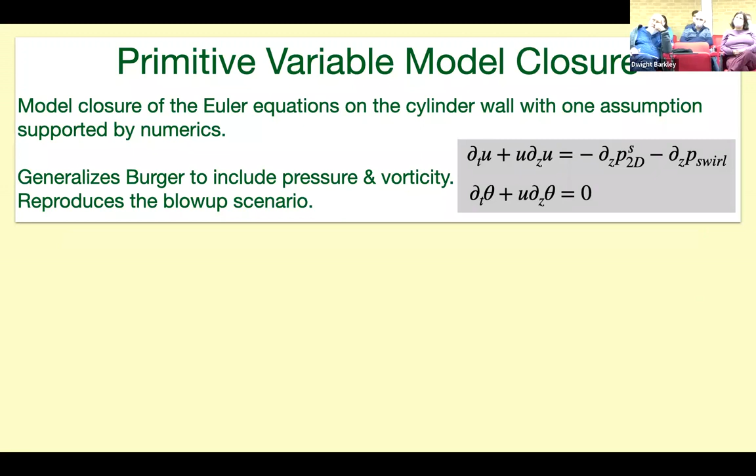In a way that is not contained in the figures I've shown. But he wants to know the vorticity as a function of R or as a function of Z. Yes, lots of the data fields - wouldn't that be an interesting question? You should have, in space as well, some behavior towards infinity.

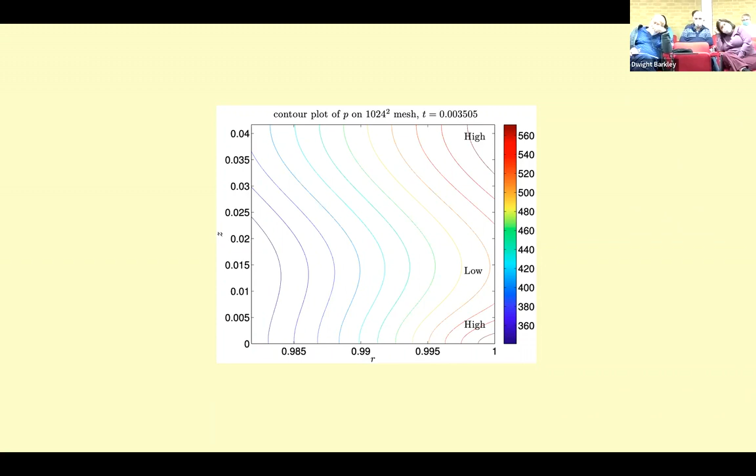Well, but the thing is, it depends on what scale you're looking at. When you blow up to this scale, everything looks as smooth as this - I mean this is a huge pressure spike. No, I mean omega.

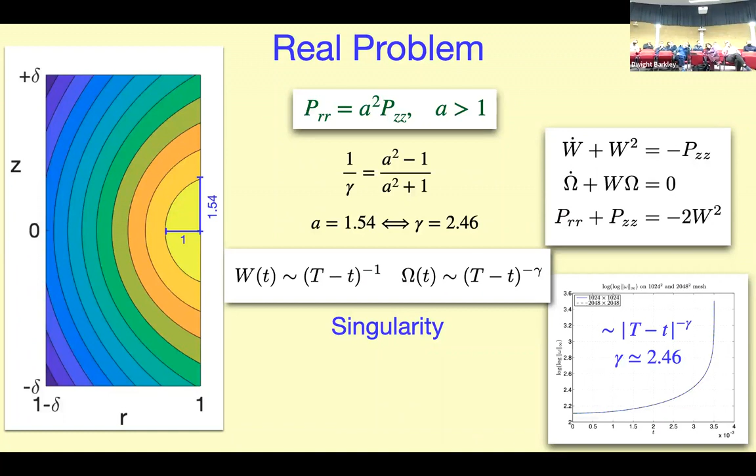Yeah, no, I know. But what I'm telling you is that everything, if I expand out, this looks like a huge pressure spike. So likewise, vorticity on this scale - I have the vorticity on this scale, I don't... it doesn't look like much because I have expanded it up to this very little region.

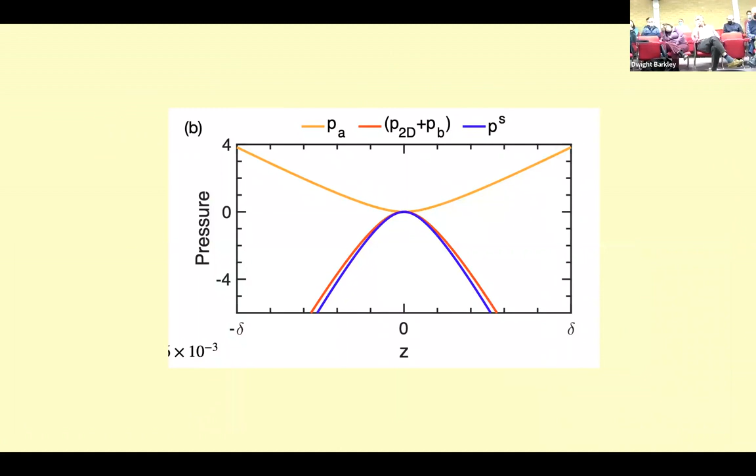But yes, I'll say - you're asking a reasonable question. You were talking about the force on the wall - the force on the wall will be infinite or not depending on the spatial behavior. Yes.

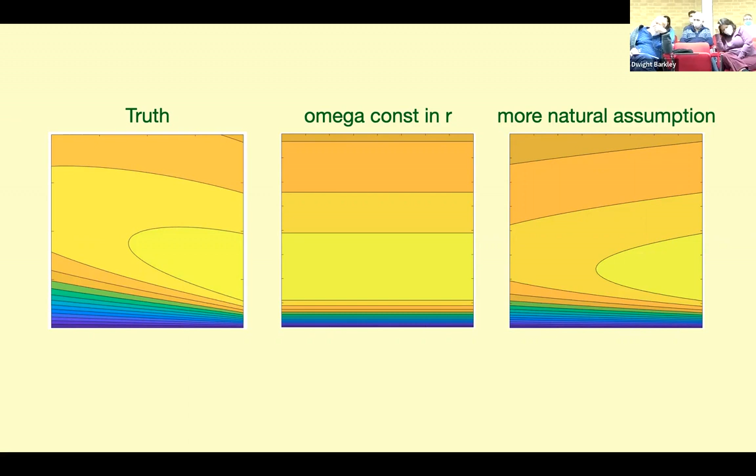Okay, maybe we'll have to - anyway, yes, I've looked at vorticity and I have the vorticity field. Although the thing is, part of the reason I haven't focused on vorticity in the talk, or even having anything very ready, is that they focus a lot on vorticity - there's a lot about what vorticity looks like around the singularity that I didn't focus on.

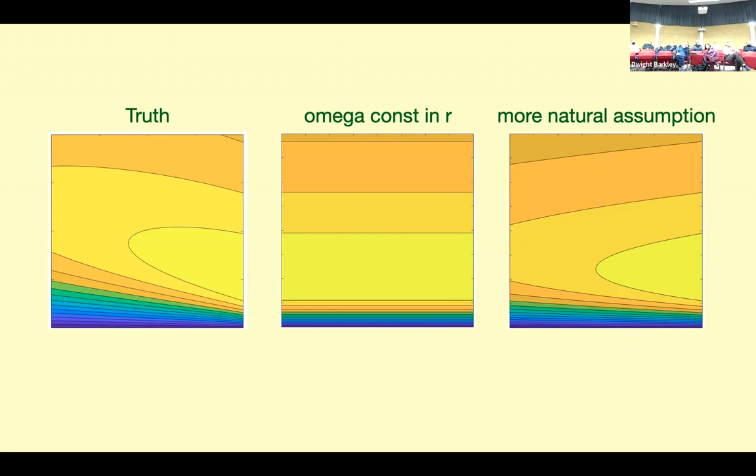I know that the boundary conditions are different, but maybe your argument would be completely different because we have Burgers' equation, and this is the drive behind everything.

So if you add a tiny viscosity, could you incorporate it at all into your argument, one way or another? Well, it depends on what you want to do with this viscosity. I'd like to see how much your argument holds ground with viscosity, because we know that if you have viscosity, the singularity should not be at the boundary, but then its boundary conditions are different, etc. So I'm trying to see.

No, but I mean, the point is the velocity is zero. So, right, this mechanism... Okay, look, one thing you could do, I agree with that, is you could artificially put in a second derivative term, the thing that would have suppressed the Burgers singularity. And then ask the question, does this still blow up?